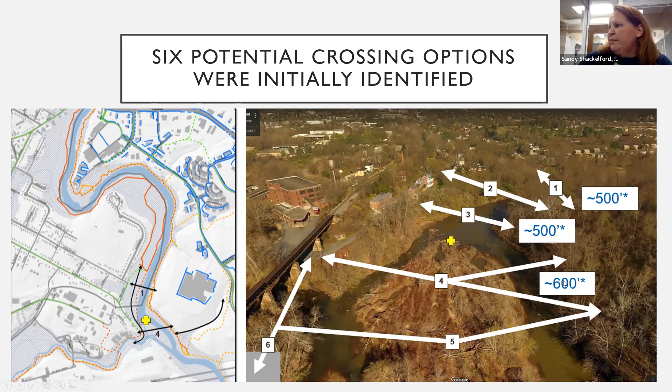In 2019, the MPO worked with VDOT to retain the services of a consulting firm, VHB, to conduct a feasibility study to determine potential locations for a bridge between Pantops and Woolen Mills. VHB initially identified 6 potential crossing options and worked with state and local staff to assess the feasibility of these sites. Crossings were eliminated based on a number of criteria, including steep slopes, accessibility considerations, right-of-way impacts, and known protected resources. So out of these original 6 options, 2 options remain, shown on this diagram as options 1 and 4. So those are the 2 that are currently still under consideration.

The 2 alignments that remained are the ones that you can see here on this diagram. So this shows you the map. Here is the top option between Pantops and Chesapeake Street, and then this lower option, which is between Pantops and the Wool Factory development site near the end of East Market Street. The top alignment is referred to as the Chesapeake Street alignment. It spans from what we are dubbing the State Farm property on the east side of the river to the end of Chesapeake Street on the west side of the river, landing near Riverview Park.

The bottom alignment is referred to as the East Market Street alignment, and it also spans from the State Farm property on the east side of the river to near the end of East Market Street, which is technically private property that's owned by the Wool Factory.

Because this is a transportation project, both alignments are required to have logical termini that provide access to the existing transportation network. That means that from either of the bridge landing sites on the east side of the river, a shared use path will need to be constructed to facilitate travel from the end of the bridge to the transportation network at the intersection of Peter Jefferson Parkway and State Farm Boulevard. So you can see that in the diagram as these white dotted lines. Those are the proposed shared use paths.

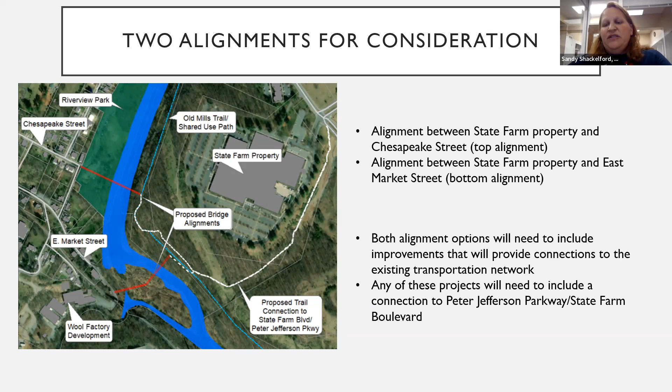On the west side of the river, the bridge landing would tie into the transportation network either through a direct connection at Chesapeake Street, so right there it would connect to the road system, or through a public use easement on the private development site of the wool factory right here. Also important to note is that the connections on the east side of the river will result in a connection at the same intersection. So the primary distinction between the two sites is the landing location on the west side of the river.

The consultants prepared a rendering of what a bridge could potentially look like at both of the proposed locations. The sketch shown here shows a rendering of a cable-stayed bridge across the Rivanna River at the Chesapeake Street site. It is important to note that either location could involve a different bridge design, but this is intended to provide a glimpse of the potential visual impact of a bridge at the two locations.

The elevation of the Chesapeake Street alignment is higher than the more southern alignment at East Market Street and would require a single span. The planning level engineering cost estimate for this style of bridge at this location is $11.3 million. So this should be considered as very preliminary since there are still a number of technical analyses that would be completed as part of the project engineering before cost estimates could be more accurately determined.

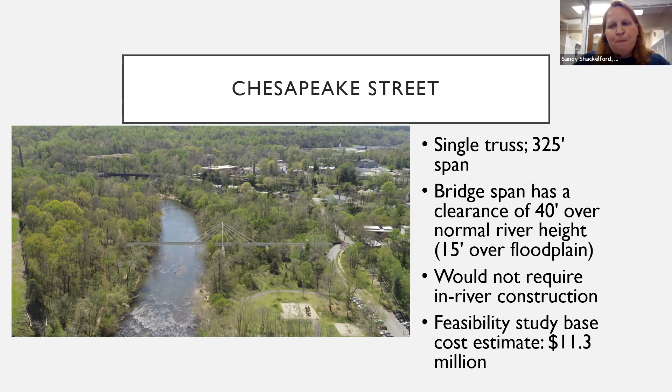The sketch here shows the potential visual impact of a two-span arched truss bridge at the East Market Street location. This bridge would have a pier that rests on the island. The elevation is lower at this location, so the water clearance is reduced compared to the first option. Again, at this location, a different bridge design could be installed, although the cost would also be altered.

The planning level cost estimate, although likely to increase as the engineered plans are developed, is intended to provide an understanding of the cost differential between the different bridge options. So the planning level engineered cost estimate for the bridge at East Market Street was about $15.3 million.

In November of 2020, MPO staff facilitated a webinar reviewing the facility feasibility study with the public, addressing many of the technical questions that had arisen as part of the feasibility study. The purpose of that webinar was to provide an opportunity for the public to ask questions about the feasibility study and share comments and thoughts. But the MPO did not have clear guidance on moving forward towards project implementation at that time. The feedback that was received has informed the engagement process we have been conducting over the last several months.

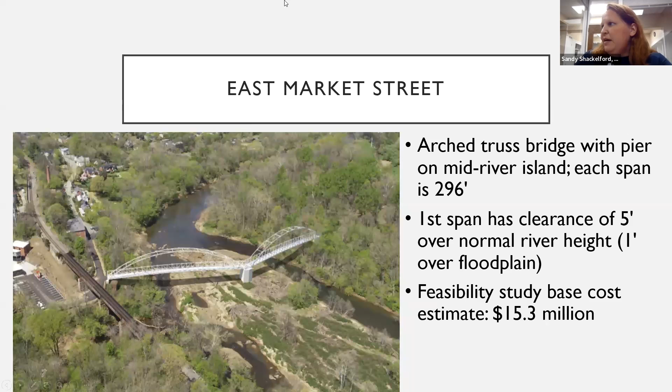So at this point, I'm going to go ahead and pause again and see if there are any questions. Anybody have any questions on the project background before we move forward? No. Yes, Mr. Ignatz, you can go ahead and unmute yourself and ask your question.

Yeah, and looking at those cost estimates, they seem to be very excessive to me. $11 million and $15 million for a trail bridge. You can buy prefabricated trail bridges ranging anywhere from $500 a foot to $2,000 a foot. And you already have a truss style bridge at the Woolen Mills. So I think that would probably be the preferred style of bridge to place, which would be much cheaper than either of those two options, I think.

And I think given that we are in a university town and University of Virginia has an engineering department, I think it would be smart to engage the engineering students there to come up with some plans rather than going to a commercial engineering firm. I think it would save a lot of money.

I can take an initial shot at answering that question, and from what I understand, a large portion of the cost is not related to the actual construction of the bridge itself, but the costs involved with the installation and construction. But I'm going to go ahead and see if Chuck Proctor, the VDOT planning manager, would like to respond to that comment. Yeah, if you go with a simple truss bridge, it is cheaper.

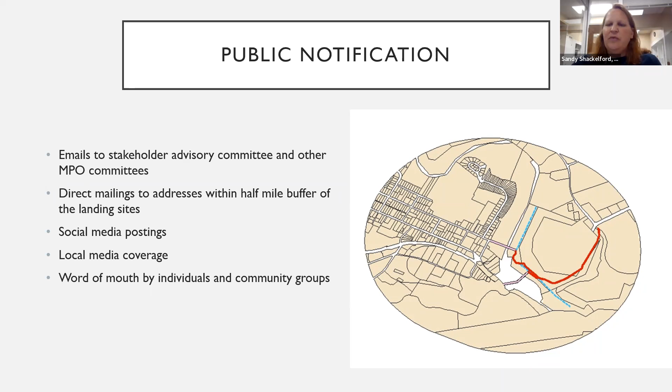To get the word out about this project and what the opportunities are to provide comments, we made sure to notify all of the MPO committees and the stakeholder advisory committees to share the opportunities through their networks. We sent out a postcard mailing to all the addresses within a half-mile buffer of any of the bridge landings, posted information through our social media platforms, and provided information to local media and community organizations on request that help to distribute the information and raise awareness of the engagement opportunities.

And so now we're going to get into the discussion on the different impacts that we discussed as part of the evaluation of these 2 bridge options. And I realize this is probably where a lot of the discussion will happen. I do not have a designated point to stop and address questions, but I'll be looking at the activity along the way, and we'll pause as necessary to respond to questions and comments.

So the first thing that we did was create a list of the factors that we needed to make sure we covered as part of the discussion. The factors were informed by the MPO's Citizens Transportation Advisory Committee, and then they were reviewed by the Stakeholder Advisory Committee.

So the first thing I want to talk about tonight is how this bridge potentially fits into the overall network connectivity for the area. The need for overall improved connectivity is well known to most of us that have been involved in this process, and probably to most of you all as well.

This bridge is not intended to solve all of the network connectivity concerns in the area near the proposed landing sites, but is intended to solve a very important network gap in the local area, which is providing a path for bicyclists and pedestrians to cross the river, which is currently a barrier to movement. However, how the bridge fits in with the overall network connectivity in the area is an important consideration in informing the bridge alignment that is selected.

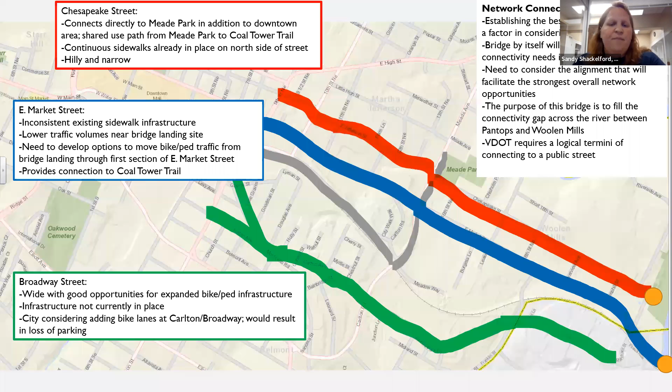So users could access Broadway Street from the landing site at the end of East Market Street through the public use easement that goes through the Wool Factory development site. But this would involve traveling through the main parking area of the development with no dedicated bicycle or pedestrian pathways. Broadway Street is wide and there are opportunities for future bicycle and pedestrian infrastructure to be installed along the street, but it does not currently exist and there are no set plans for that to move forward on any specific schedule.

Right. In addition to connections to the transportation network system, also under consideration is how the bridge will facilitate travel along the trail system. There are two trail systems on either side of the river currently. There's the Old Mills Trail along the east side of the river, shown by the dotted green line right here. And then along the west side of the river is the Rivanna Trail system, which are shown with these green lines.

The Chesapeake Street alignment would provide a direct access to the Rivanna Trail system at Riverview Park, and the East Market Street alignment would provide a more direct access point to the Rivanna Trail system through the Wool Factory development site. While either portion of the Rivanna Trail can be accessed from either of the bridge landing sites, travel between the sections at Riverview Park and the Wool Factory currently requires short distances to be traveled on the road. You can see that in red, those are gaps in the actual trail where you'd have to get off the trail and travel along the road network in order to make that connection.

As we've discussed the proposed alignments of this bridge with the Stakeholder Advisory Committee, parking has been a major topic of discussion due to existing parking shortages at Riverview Park. It is outside the scope of this project to alleviate the existing parking demands, but understanding the concerns that there will continue to be incremental impacts if a bicycle and pedestrian bridge is placed at this location, we've worked with the city and county staff to discuss potential options to explore increased parking facilities.

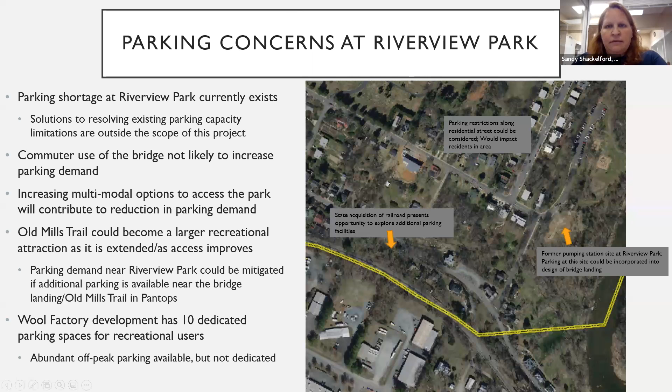Going on to talk about ADA accessibility. This is a requirement for any transportation project. And the requirement is that any new infrastructure intended for bicycle or pedestrian use has a grade of 5% or less, unless it is adjacent to an existing roadway that has a grade in excess of 5% already. As presented in the feasibility study that was conducted, there's a section of the shared use path on the Pantops side that connects from East Market Street, the East Market Street alignment, that exceeds the 5% grade requirement, and that section will have to be rerouted to reduce the grade.

While the project itself can still meet the ADA requirements, it was noted during the discussion with the Stakeholder Advisory Committee that traveling from the landing site near East Market Street would require users to move up grades of more than 5% along the established transportation network in order to get to the road network. That last section of East Market Street going down towards the landing site is very steep, and also going through the development site would require travel up a driveway that is also very steep. So it's not required that this project resolves the steepness of that slope, but it was something that was noted by the Stakeholder Advisory Committee.

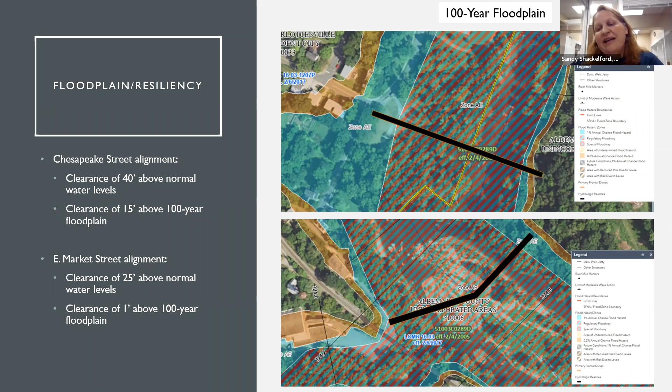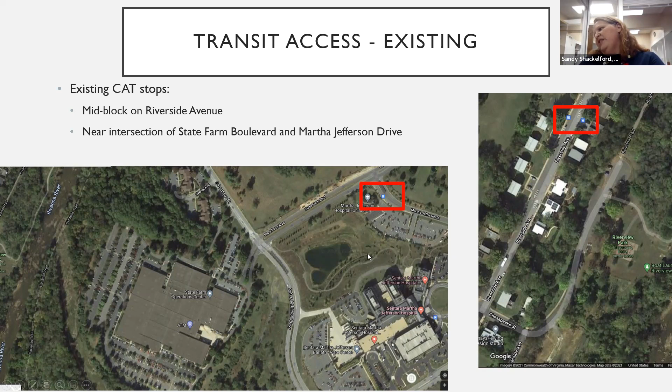Transit access. The local area is currently served by the Charlottesville Area Transit. On the Pantops side, the closest stop is near Martha Jefferson Hospital, shown right here. And then on the Woolen Mill side, there's an existing stop mid-block on Riverside Avenue. There's also a transit stop on Chesapeake Street near Riverview Street, so it's off the screen, but if you're coming up Chesapeake Street, it's up this way a little ways.

As far as future transit connectivity, Albemarle County has recently collaborated with the Charlottesville Area Transit to apply for a demonstration grant to pilot microtransit services throughout Pantops, which would include access to the shared use path connection that was shown on the previous slide. So it would provide more direct access to this intersection.

On the west side of the river, transit connectivity in close proximity to the bridge landing site on Chesapeake Street is more feasible. East Market Street is narrow and would make transit vehicle movement along that corridor more challenging. And while there could be opportunities to expand transit access along Broadway Street, it would still require greater travel distances to the bridge landing site on East Market Street from any transit stop.

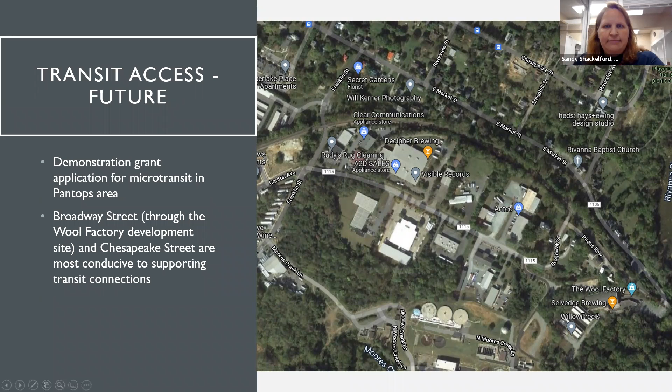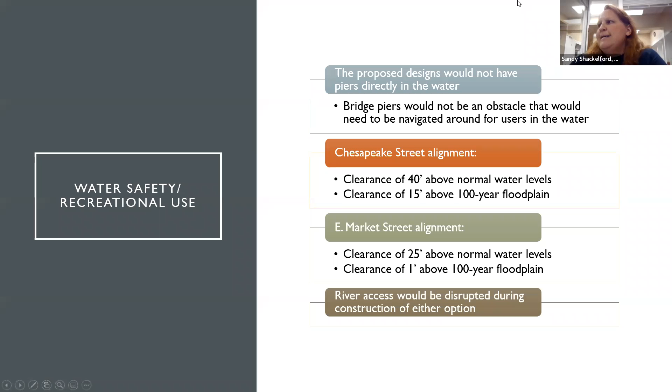All right, water safety and recreational use was another factor that was discussed during the Stakeholder Advisory Committee meetings. The Stakeholder Advisory Committee discussed how each of the proposed bridge design options would potentially impact water safety and recreational use of the river. At both locations, the bridge designs intentionally avoided the placement of piers within the waterway itself. So that removes any obstacles that would potentially have to be navigated around for those that are boating or floating along the river. But regardless of the location, river access would be disrupted during the construction of the bridge. Those will be short term.

Regarding utilities, MPO staff spoke with the Rivanna Water and Sewer Authority to discuss any potential complications related to the placement of bridges at both locations. There's a wastewater interceptor that runs through the project area that would impact where piers could be placed for the Chesapeake Street landing site. Engineers would need to ensure that the bridge abutments and piers avoid that easement area. But the Rivanna Water and Sewer Authority also indicated that additional parking could be accommodated at that site if access to the manhole was maintained and kept clear. So this would continue to be a viable solution if it is an initiative that needs further pursuit moving forward at some point.

The East Market Street site does not present the same challenges regarding utilities, though existing wastewater interceptor does not have impacts of that site. So there are less obstacles that have to be navigated as far as utilities at the East Market Street site.

And then while mitigating environmental impacts is an important factor in planning transportation projects and will be part of the overall project evaluation, there do not appear to be significant differences in the environmental considerations between the two sites as far as habitat disruption or water quality considerations. The Rivanna Conservation Alliance has a stream bank restoration project in Riverview Park near the Chesapeake Street landing site that they hope to undertake soon. And the proposed bridge landing site would not interfere with the planned project that they are undertaking.

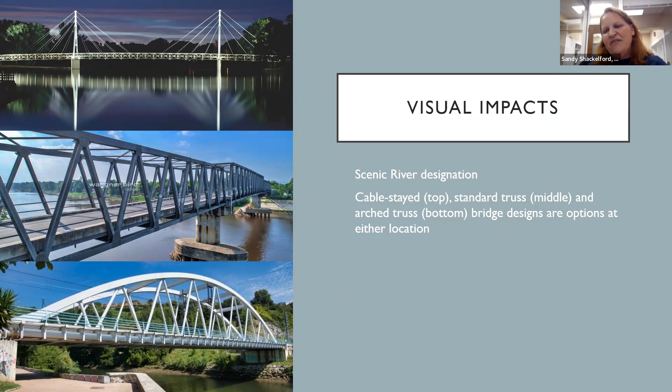In terms of cost, the standard truss bridge, so the one shown here in the middle, is the least expensive design, and then the cable-stayed bridge is the most expensive of the designs that are shown here. Because there is a really lovely view along the stretch of the river, there's been some consideration for developing a bridge that has an aesthetically pleasing design that will not detract from the overall river corridor experience.

I'm gonna go ahead and click on that. Let's see. And so this would be approximately if you were, I don't know. I lost it. Are you all seeing the panoramic of the bridge? My screen stopped sharing.

So that shows you what the view would look like from the first bridge at the one at the Chesapeake Street landing site. And this would show you at the second site a little bit south at East Market Street. This shows you what the view would look like from the bridge at that location. So you can see the differences there.

All right. So while there is a greater visual impact along an otherwise open stretch of river at the Chesapeake Street alignment, which is this top alignment right here, the Stakeholder Advisory Committee discussed how this also provides an opportunity for a greater range of the public to be able to experience this view that can currently only be experienced by those that are floating or boating on the river right now.

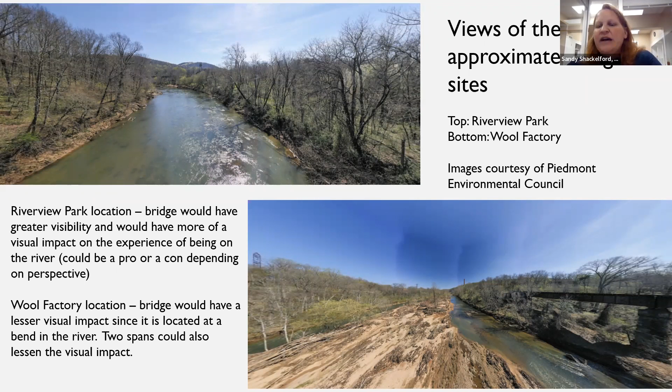And then we also discussed how the bridge location may impact the desired design of the bridge. So while the alignment at Chesapeake Street will offer better views of the river, there's also a desire expressed for the bridge at this location to have a lighter design to minimize the visual disruption of the view shed. Whereas a more industrial design may not feel as out of place at the bridge alignment going to East Market Street.

We also spent a lot of time talking in the Stakeholder Advisory Committee meetings about how a bridge at either of these locations may impact local residents near either of these sites. Whether a bridge near a residential area is desirable or not is largely a matter of individual perspectives and priorities. So what one person sees as a positive impact, somebody else might see as a negative impact. It really depends on how much direct access to a location of interest the bridge provides for an individual, and how much that is a priority versus how much new disruptions or changes to the existing landscape might present more of a negative impact to another user.

The concerns that were raised through our Stakeholder Advisory Committee discussions are shown here. There are concerns about the additional strain to the parking infrastructure available in the area, which we discussed earlier. There's concerns about additional vehicular traffic through the residential areas. Most notably, this was a larger point of discussion for the bridge landing at East Market Street, but both areas would have potentially additional impacts on the amount of vehicular traffic that would impact the neighbors in the area.

And then there's also a desire and expectation from residents in the local communities that Riverview Park will be maintained as a natural area, as well as the visual impact of the bridge landing site, just disrupting the experience of being in either the neighborhood or the park, presenting a negative impact that some users felt needed to be considered as part of the evaluation of these two bridge options.

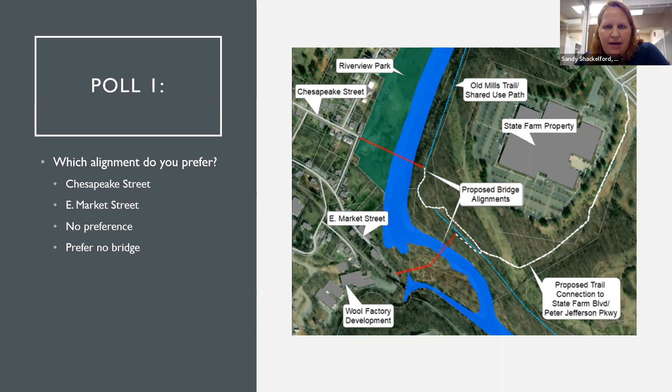All right, I'm going to end the poll and share the results. For the Chesapeake Street alignment, there was a stronger preference for the cable-stayed bridge. At the East Market Street alignment, it's actually pretty split between the cable-stayed option, the standard truss, the arch truss, and not preferring a bridge at the location. So it does look like there's maybe a slightly stronger visual preference for the Chesapeake Street alignment compared to the East Market Street alignment. Thank you all for that input.

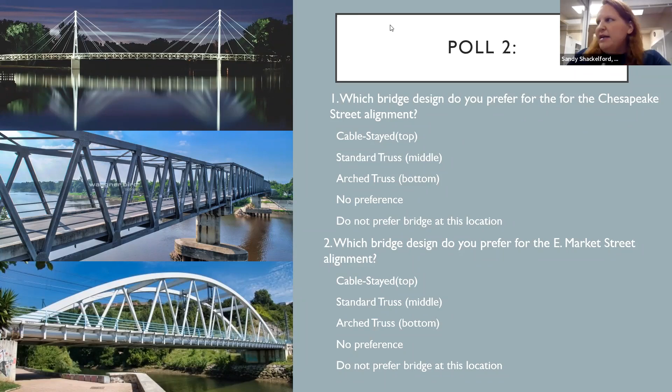So I'm going to stop there and, before we discuss next steps, see if there are any other questions that have not been addressed. If you'd like to either type a question into the Q&A or raise your hand, I'll be happy to call on you.

No? Right. Otherwise, you guys are taking it kind of easy on us tonight. All right, so what are we gonna do next?

I mentioned previously, oh, there's a raised hand. I knew that would happen. Go ahead. Go ahead, Liz, or Ms. Russell, you can go ahead and unmute yourself and ask your question. Thanks, Sandy. I am pulled over in my car because I'm trying to pay attention.

There's some discussion in the chat about the earlier audience member's design and could it be considered? And I didn't fully catch what he was recommending, but I do think maybe it could be made more clear by you or by Chuck that, correct me if I'm wrong, this process, the build, the design, the engineering, it'll all be subject to VDOT standards.

So while it sounds great that we'd love to utilize UVA's engineering school, I don't think that's a possibility in a VDOT project. And perhaps there's elements about that design that he mentioned that would not meet the standards that they're going to require for a Smart Scale project.